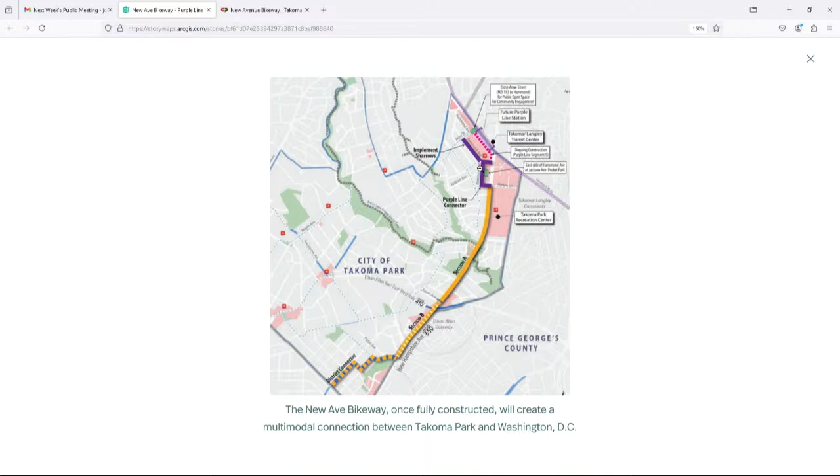Looking at what is our study area: we start at the intersection of Anne Street and University Boulevard, and travel. This is where we would connect along the sidewalk and future crossings to the Purple Line station, which will be center running in this location, and then the transit center on the opposite side. So starting from this Anne Street and University Boulevard intersection, coming down through the neighborhoods and connecting to the New Hampshire Avenue corridor by way of Holton Lane.

We have some major design considerations to factor in on this project, one of which is just traffic calming and traffic diversion. We've heard anecdotally from the community that there's high vehicle volumes, high vehicle speeds, and just kind of unsafe driver behavior as people cut through the neighborhood. And that's only been exacerbated by the Purple Line construction. So that's definitely something that we're considering as we look at design alternatives.

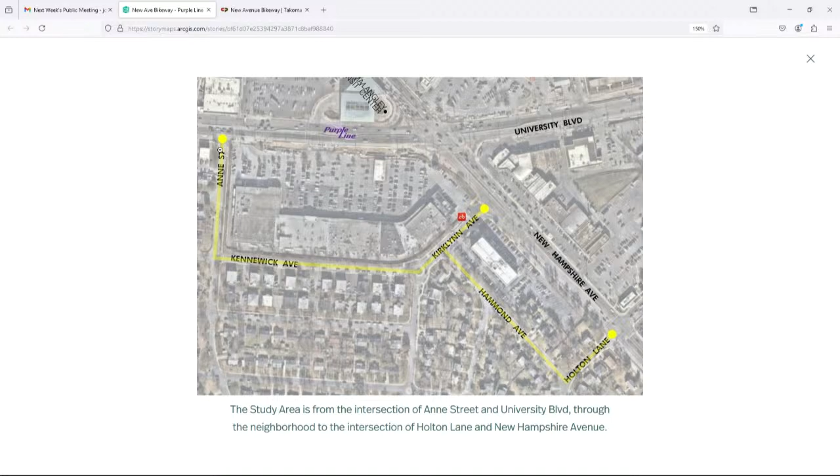And I should have mentioned, back up here, our part of this project is looking at this Anne Street and University Boulevard intersection. There is consideration for closing access to Anne Street from University Boulevard, which is basically what is happening currently when the Crossroads Farmers Market is in operation once a week for 7 months out of the year. So looking at making that condition more permanent with the opportunity to have more public space amenity and even some programmable space. So that's up for consideration in this project.

So we're definitely keeping that under consideration for our design alternatives, and we don't want to disrupt that operation of the farmers market.

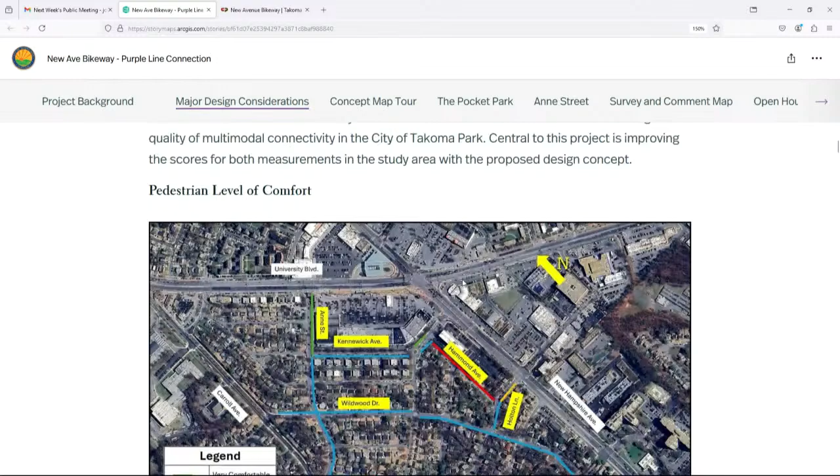As we look at existing conditions in the project study area, pedestrian level of comfort and bicycle level of traffic stress are two metrics we use in the industry to evaluate the quality of the pedestrian or bicycle facility. Pedestrian level of comfort is mostly based on physical characteristics of the roadway, like posted vehicle speed, number of travel lanes, and whether there's a landscape buffer for the sidewalk or separation between vehicles and pedestrians.

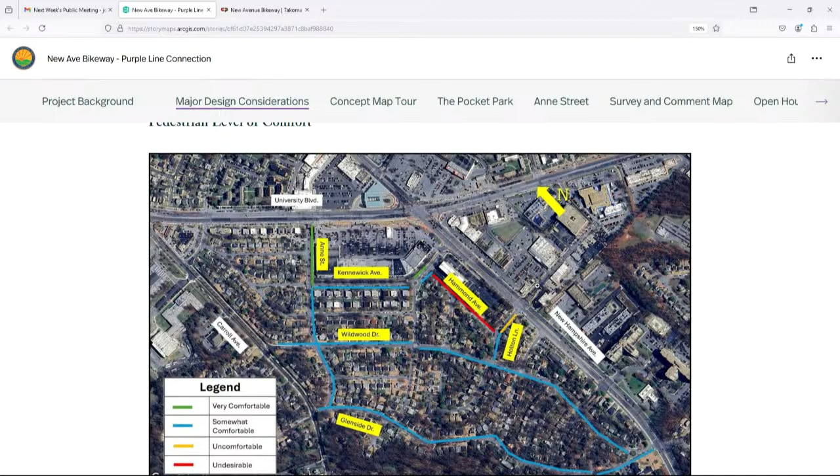Ideally, we want a somewhat comfortable or very comfortable environment, which would be a green or blue street. What sticks out is Hammond Avenue in red, where there are currently no sidewalks. Outside of that, the study area is a pretty comfortable environment for pedestrians.

Looking at bicycle level of traffic stress, which is also primarily based on physical characteristics of the roadway, we want a low or very low level of stress for bicyclists. Even though there aren't any existing designated bicycle facilities in the project study area, based on the physical characteristics it's a pretty low stress environment, making it ideal to offer an alternative to that University Boulevard, New Hampshire Avenue intersection.

From there, I'd like to walk through our design and the concepts we're considering for the study area. I'll start up here at Anne Street. We're looking at a couple of alternatives for this intersection and this half block area, which I'll get into later in the presentation.

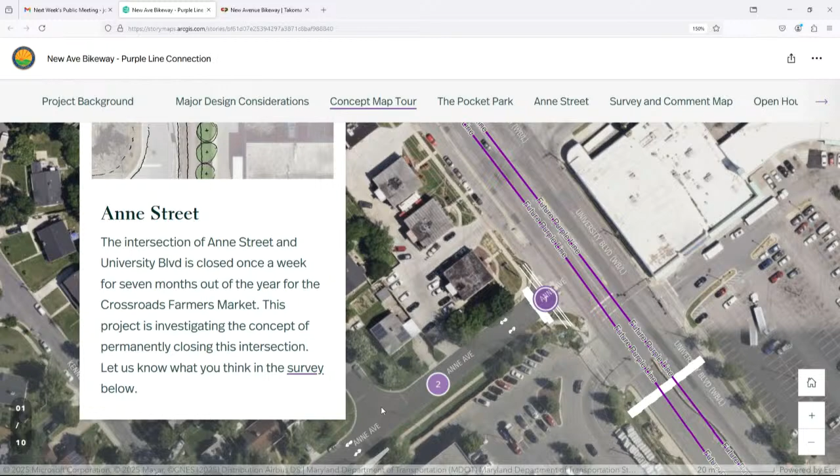Looking at the conditions of Anne Street and the needs of the farmers market, we're proposing to add shared lane markings in the roadway, which would alert people to bicyclists sharing the travel lane. This allows us to maintain the on-street parking in this area and suit the needs of the farmers market as well. We're also looking at the opportunity to widen the sidewalk to even an 8-foot or 10-foot sidewalk or shared use path.

This would be south of Hammond Avenue, not really north of Hammond. As I mentioned, it seems to suit the farmers market operations to have the grass on either side of the sidewalk, so that's the reasoning for cutting it off at that location.

None of the design alternatives we're considering impact the operations of the farmers market. We expect it to continue at its current frequency and pace. If anything, we're trying to support it as best we can with improved pedestrian and bicyclist facilities.

As we continue down from Anne Street, we'll connect to Kennewick Avenue, where there's a proposed new high visibility crosswalk to connect to the existing sidewalk on Kennewick Avenue. Kennewick has this existing sidewalk on the south side of the street, with some landscape buffer providing separation as well as on-street parking, so it's pretty comfortable for pedestrians in its current state.

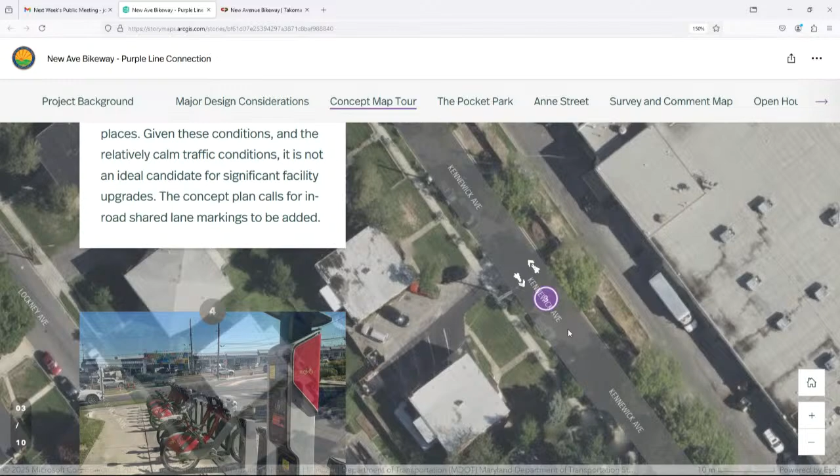It also already has some existing traffic calming, and here we're again proposing shared lane markings in the road to alert drivers to bicyclists sharing the travel lane. We're showing those shared lane markings continuing all the way through to Kirklynn Avenue, where we have an existing Capital Bike Share station that we want users to be able to connect to along the alignment.

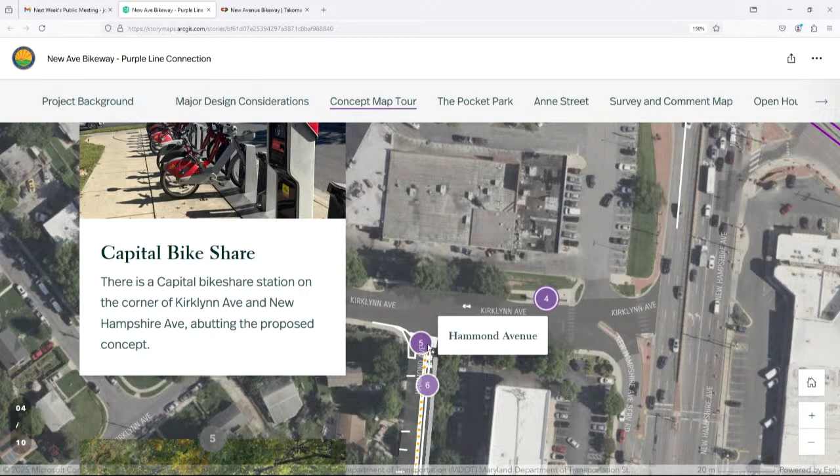Getting to Hammond Avenue, in this section it's a one-way northbound street, and it's pretty wide. In this area it has on-street parking on both sides of the street, and we've heard anecdotally that drivers can often come and turn here, traveling the wrong way down the street, just not realizing that it's one way, even though there is signage. It's just not visibly noticeable that it's a one-way street in this area.

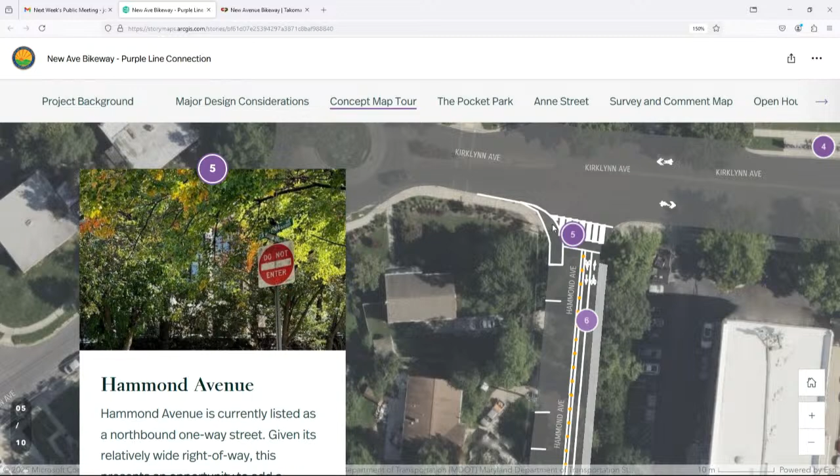So we're proposing some pavement marking improvements, maybe even some flex posts, to tighten up the intersection and help make it a little more visible that it's a one-way street that you shouldn't enter. Along Hammond Avenue, we're proposing a two-way separated bicycle facility on the east side of the street.

In addition, there would be a 5-foot sidewalk in the existing right-of-way. This would maintain the current curb alignment and would remove parking on this side of the street, where in this area there are no residences. It backs up to an office building, and there's significant right-of-way on this side of the street that's available.

Traveling down Hammond Avenue, we've also proposed some pavement marking and flex post improvements to try to tighten up the intersection. The idea is that this would be quick build and easily implementable, trying to provide some traffic calming as well, because we've heard of drivers speeding around these intersections, which can be pretty unsafe. So we're looking to provide some narrowing of the travel lane as best we can on both sides.

Ultimately, south as we continue past Jackson, Hammond is two-way, so you do have to consider that alignment of the vehicles as we're designing.

On this side, one thing I'll get into a little later is we're looking at the opportunity for a pocket park or parklet here. There's more right-of-way available in this area, and perhaps there's an opportunity to really leverage some of that space for a new kind of public amenity. I'll get into some of those alternatives in a bit.

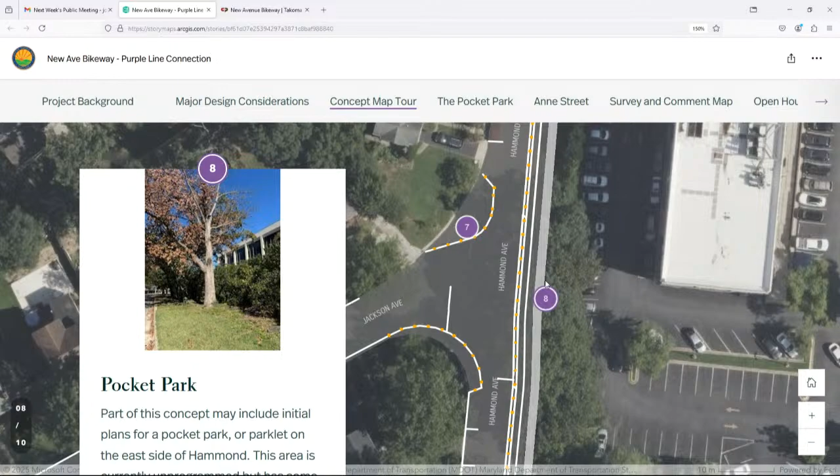Continuing further down Hammond, you can see that the two-way separated bicycle facility would continue the full length of the street, and the 5-foot sidewalk would continue the full length as well.

Down at the Holton Lane intersection, we're proposing pavement marking and flex posts to tighten up the intersection and provide some traffic calming to help reduce vehicle speeds. Holton Lane is downhill in this direction, and this new high visibility crosswalk would connect the proposed sidewalk with the existing sidewalk on Holton Lane, connecting all the way up to New Hampshire Avenue.

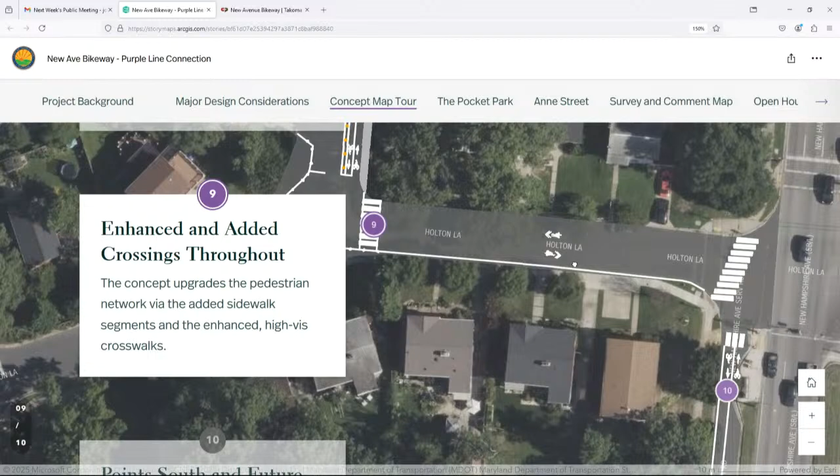For this final connection for bicyclists, we're proposing shared lane markings on Holton Lane, which is a pretty calm street with on-street parking on either side, providing that connection to the two-way bicycle facility in the service lane on New Hampshire Avenue.

Bicyclists would use this crosswalk to come out of the cycle track onto Holton Lane, or could fairly easily make this connection traveling eastbound on Holton Lane and connecting to southbound on New Hampshire Avenue.

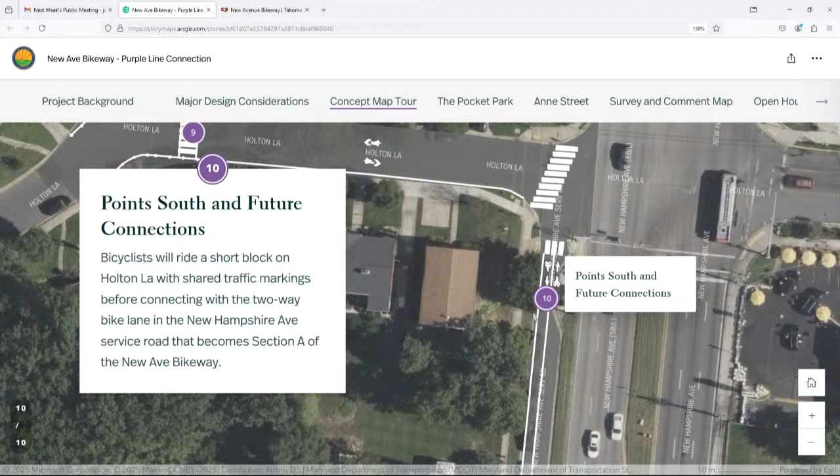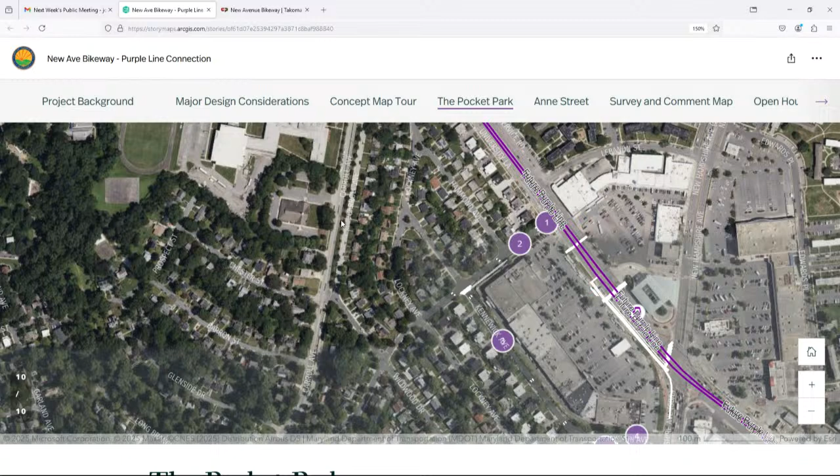So that provides a brief overview of the full concepts we're considering in the study area. From there, I'd like to get into some of the design alternatives, specifically at Anne Street.

As I mentioned, there is consideration for closing off access at University Boulevard, and this provides a number of different options for how to use the space.

It does seem like, at least with the farmers market, there's regularly music performances, and this is an opportunity to expand and build upon that community amenity. Perhaps even outside of the farmers market, there could be events hosted.

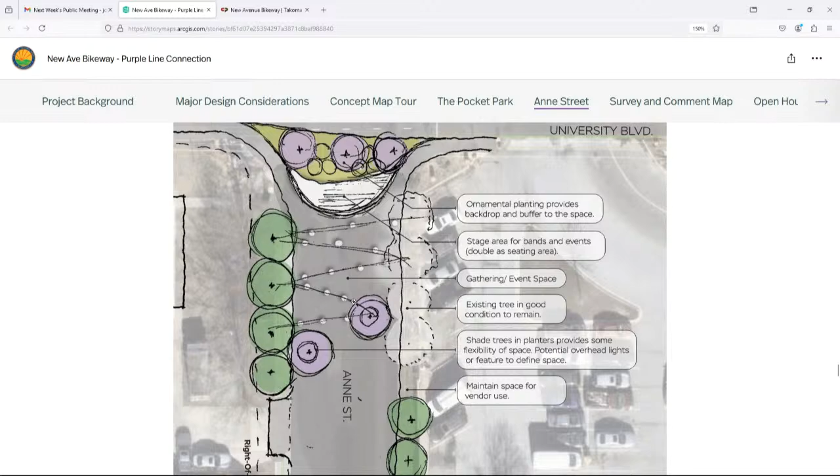In the street itself, it could serve as a gathering or event space. There's opportunity for additional tree planting.

This is showing just as a place of reference. This line here is the space from here to the fence, or the brick wall to the shopping center. This space, we're maintaining that same amount of space, not narrowing it, just to provide a reference.

On this side of the street, we realize there are 2 driveways, so access would be allowed for those 2 driveways in this section of Anne Street, but would be closed for other vehicle access. It's worth noting that these 2 properties have secondary points of access, either on Hammond Avenue or University Boulevard, which is also one of the drivers for why this could be feasible and possible.

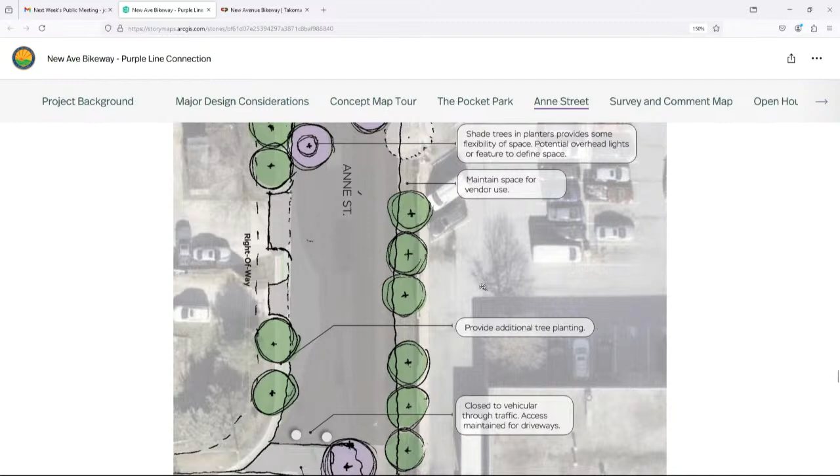And that would terminate here at Hammond Avenue.

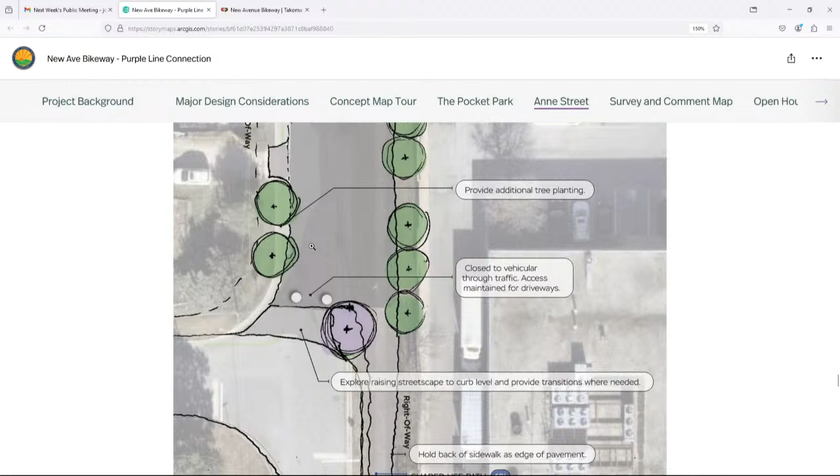There's a lot of options down here on how to do this. It could be with large planters, or bollards that are removable or that can go down into the street with remote access or key access; there's a number of different options that could be explored. Even raising the streetscape in this section so it's level with the sidewalk would also offer more event space opportunity. Those are options that can be explored further in subsequent design phases, but just trying to give an idea of what could be possible here.

The other option, which maintains access from University Boulevard, extends the curb just slightly at the corner here in alignment with the Purple Line plans. That provides maybe shortening this pedestrian crossing distance.

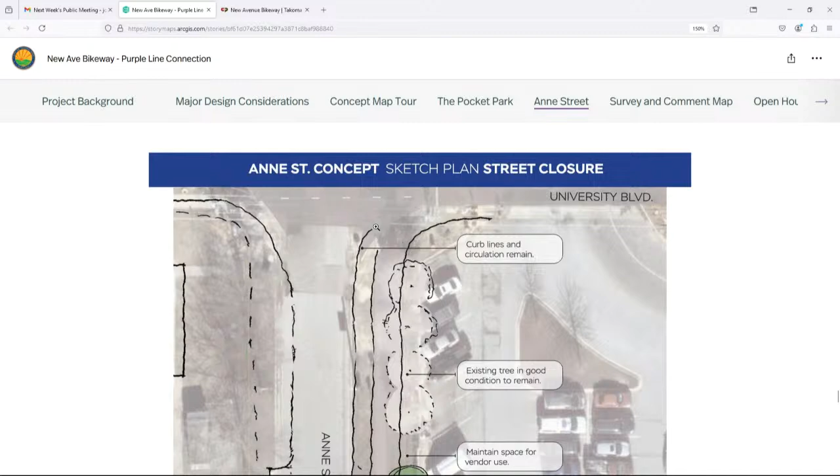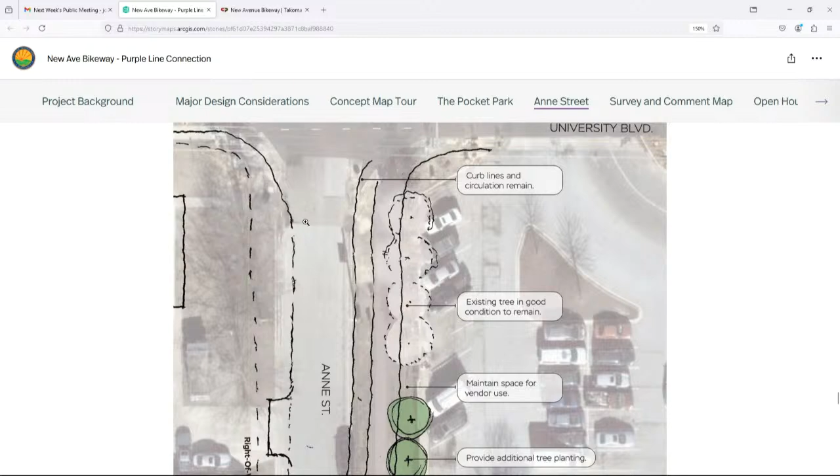And then maybe an opportunity for additional tree plantings in the right-of-way, widening the sidewalk a little bit, as much as 10 feet in places. So just a slight narrowing of the street in this option in alignment with the Purple Line plans, but maintaining that access from University Boulevard — kind of an apples-to-apples comparison there.

Taking you all back to Hammond Avenue as we jump around here, we're exploring the opportunity for a pocket park or parklet at that Hammond Avenue, Jackson Avenue intersection, and we have 3 design alternatives that we're exploring here.

Option 1 is the least invasive of the options. It maintains the existing curb alignment, adds that 5-foot sidewalk basically behind the existing curb, and still provides about 10 feet between the sidewalk and the right-of-way line to have a little bit of plaza space, green space, and some bench seating.

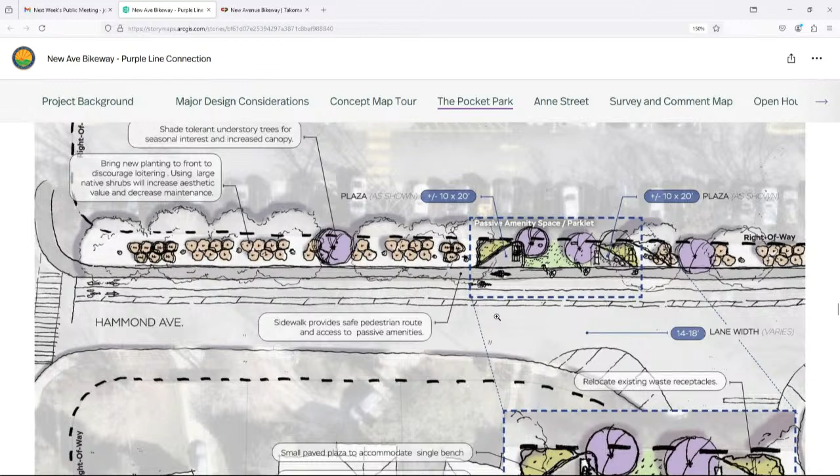It also maintains a consistent alignment of sidewalk and separated bikeway, and results in still a fairly wide travel lane with no impacts to parking on the west side of the street. As a result of being the least invasive option, it is also the lowest cost option.

Continuing on to option 2. This is the most invasive option and therefore the highest cost option. It shows realigning the curb line enough to expand the parklet area. While it is the most invasive and highest cost, it offers the biggest park space in this corner. We basically extend the curb out and shift the bikeway to get a narrower travel lane and help reduce speeds. We get almost 18 feet between the back of the sidewalk and the right-of-way line.

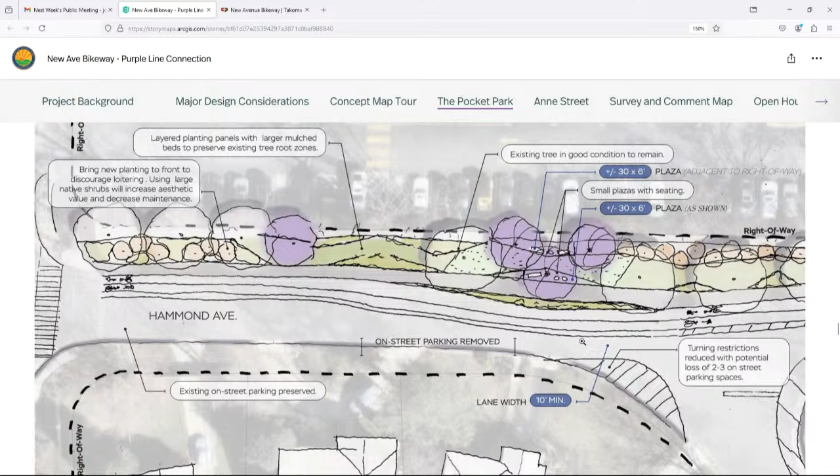Yeah, almost 18 feet between the back of the sidewalk and the right-of-way line. That can be, here it's shown as a combination of plaza space and green space, with a little bit more bench seating. Again, options to be explored in subsequent design phases. This option would impact on-street parking on the west side of the street, so it has additional parking impacts beyond what's already been shown.

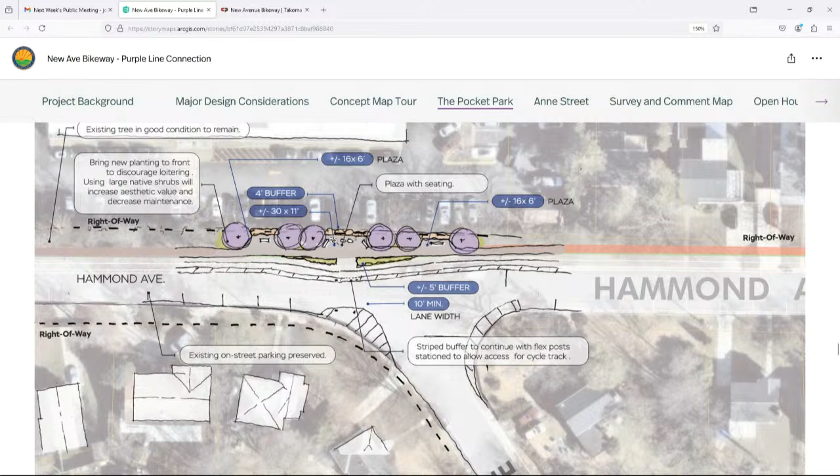Finally, option 3 is kind of our middle of the road option. It has medium costs associated with it because it realigns the curb just slightly. So we still get a narrower travel lane where we most need it, but it's less invasive. Existing parking on the west side is preserved, and we get about 15 feet between the back of the sidewalk and the right-of-way line. You can see here a little bit more expansive bench seating and plaza area, with just a slight landscaping buffer between the plaza area and the right-of-way line or the wall from the office building.

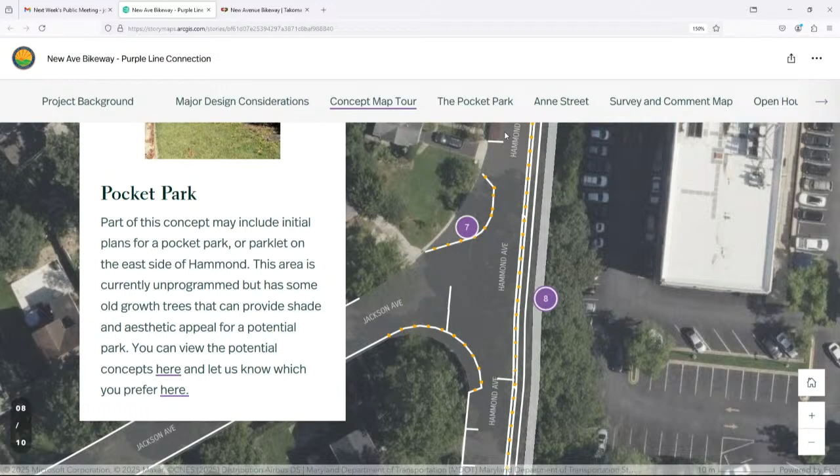So, those are our proposed concepts and design alternatives. We would love to hear from you tonight or over the course of the next 10 days while the comment period is open. You can provide your feedback either in person here tonight using sticky notes on our roll plots, writing down what you see, questions, comments, what you like, what you don't like.

You can also provide your comments from home using the survey and comment map, where we're asking a series of questions on which concepts you favor, both at Anne Street and at the Pocket Park, asking for any information or feedback you'd like to convey to the project team, just general comments and feedback. If you'd like to continue to receive project updates, you can provide your email address. We also have a comment map, so if there are other features you'd like us to pay attention to, or you want to note some safety concern or traffic concern relevant to the project...

There's a comment map here where you can click on new feature, and then you get this symbol where you can add a dot, add your comments, and then click create, and that will effectively document your comment on the map so we have a visual point of where you're trying to provide your feedback.

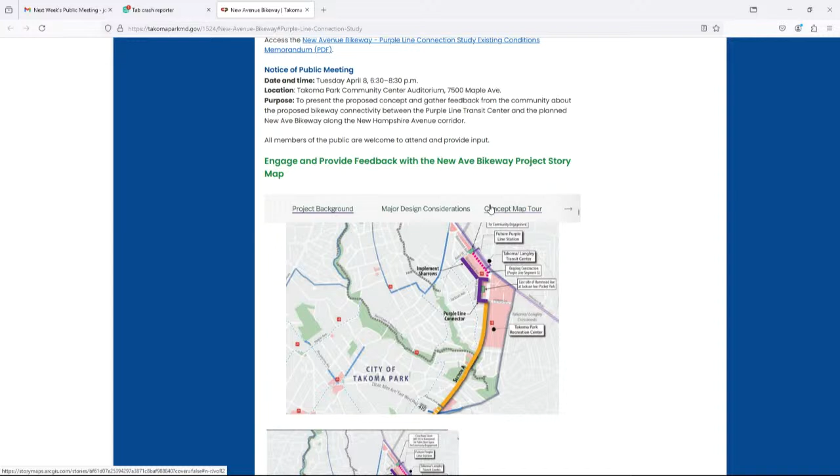Maybe I will refresh. As you can see, again, this is through the city's website, and you can see all the content that we've just walked through tonight. As you navigate to the right here, you'll see that survey and comment map tab pop up, and there are links here to the survey. Scrolling down, there's a link to the comment map. We would love to hear from you. This will remain open until April 18th, so the next 10 days roughly.

We look forward to keeping you updated as the project progresses. Thank you all for coming. I'm happy to take some questions in the meantime, and then offer an opportunity to walk around and provide feedback. Yeah, thank you so much.

A question is, what is the rough timeline of when this might be done in relation to the rough timeline of when the Purple Line station would open? Do we think this would be done before, or about the same time, or after? That's a good question. Yeah.

So right now, this is just conceptual planning. We've not done designs as yet. So it really depends on where we go from here. Does the concept move on to design? Do we get funding for the design? Then we can establish a timeline. The Purple Line is expected to open in 2027? Yes, early 2027, as of today.

Any other comments or questions? Or do you just want to take it to the roll plot?